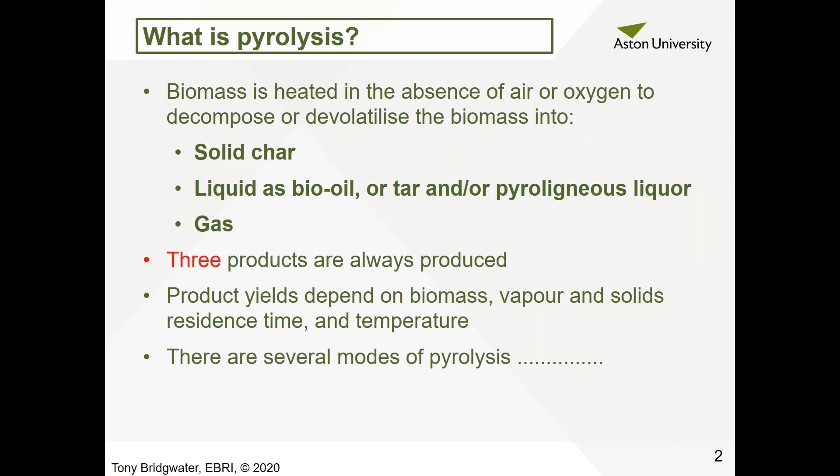There are several modes of pyrolysis. Fast pyrolysis, which is what most people are currently interested in, typically operates around 500 degrees centigrade with very short hot vapor residence times, typically less than 2 seconds, and short solid residence times. Under these circumstances, you get up to 75% weight liquid, with some solid char and some gas.

Then there's slow pyrolysis, which is a very old technology going back thousands of years. This operates at rather lower temperature, but with much longer hot vapor residence times and very long solid residence times. Under these conditions you get roughly a third liquid, a third solid, and a third gas.

Torrefaction is a relatively new technology, and this is essentially low temperature pyrolysis, typically at 250 to 300 degrees, with long hot vapor residence time and long solids residence time. The main product is a solid, typically 85%, which is intensively dried and slightly decomposed biomass.

Then there's gasification, where the main product is gas, up to 99%, with a little tar that needs to be separated before most applications, and some solid, although all the solid produced is burned within the process. This is high temperature, with short hot vapor residence time and short solid residence time, and the upper temperature is limited by the need to avoid slagging or sintering of the ash in the biomass.

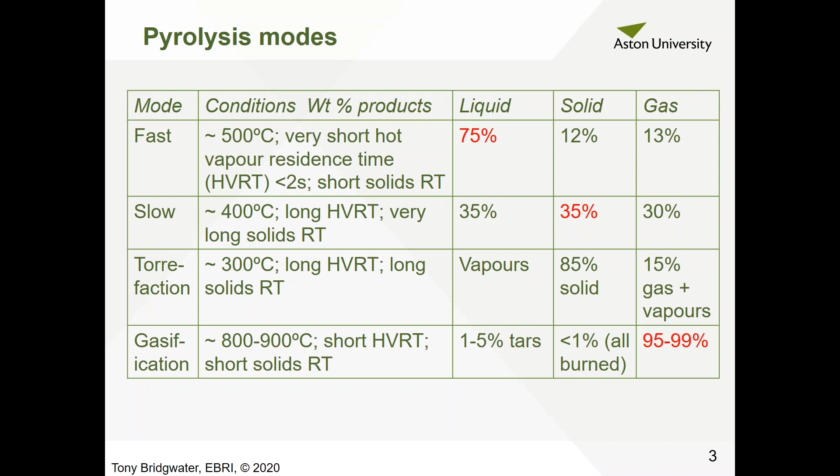Fast pyrolysis products: the objective of fast pyrolysis is to maximize the liquids. We have very high heating rates, and because biomass has low thermal conductivity, we need small particles, typically less than 3 millimeters, although some can use up to 5 millimeters. We need less than 10% water, because all the water in the feedstock ends up in the liquid product, and too much water has an adverse effect on the properties of the liquid. It can cause phase separation and reduce the heating value, though it does have the advantage of reducing viscosity. So the general rule is to limit the water content of the feed to less than 10%.

Clean wood gives the highest liquid yield, up to 75% weight on a dry biomass feed, and this is homogeneous, i.e. single phase and low viscosity. The charcoal forms about 10 to 15% weight of the products, and this contains all the alkali metals that have a deleterious effect on the quality of the liquid.

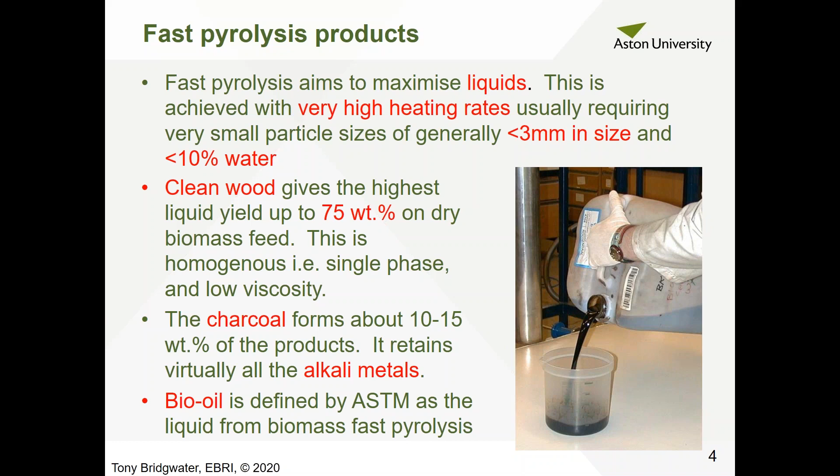Bio-oil has been defined by ASTM as a liquid from biomass fast pyrolysis, and it specifies the conditions under which it's made. Bio-oil is now limited by this definition to the liquid product from fast pyrolysis of biomass. The liquid is homogeneous, and some of the key parameters are shown here.

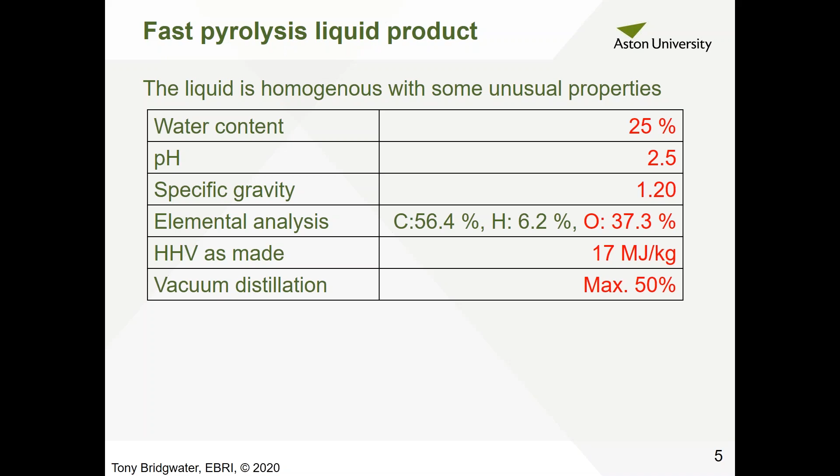In terms of yields, this slide shows the 4 main products. The red line is the organics, and you can see this peaks typically around 500 degrees. At lower temperatures, you're getting incomplete pyrolysis and lower organics yield. As temperature goes up, the organics, which form the main part of the liquid, begin to reduce. The gas yield goes up as temperature goes up, and the char yield goes down as temperature goes up.

The reaction water, which is not the water in the biomass but the product of the pyrolysis reactions, peaks at typically around 550 degrees. The important thing to remember is that the bio-oil that is discussed, reported on and worked on is the organics plus the reaction water plus the feed water.

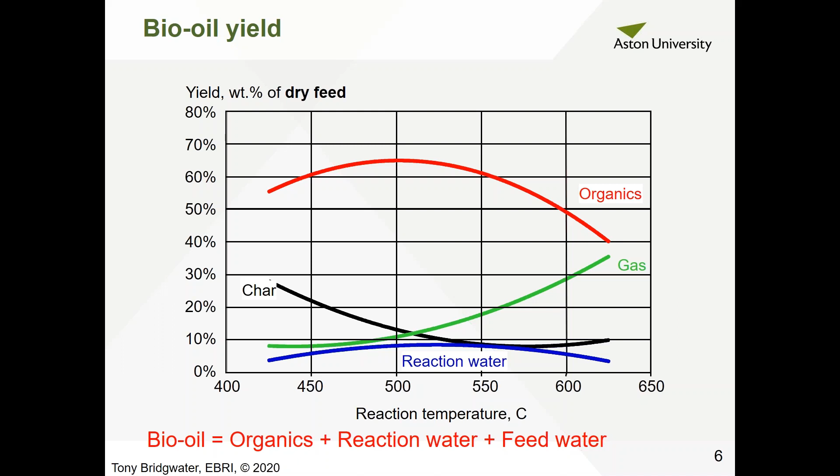Now, the fast pyrolysis requirements - again, it's important to remember that it's the organics that provide the energy and the value in the product. These can be converted into chemicals or fuels, and the organics yield is therefore very important. Some of the basic requirements of a fast pyrolysis process are high heating rates.

You need small particle sizes as biomass has low thermal conductivity. You need dry biomass, less than 10% water, because all the feed moisture ends up in the bio-oil product as well as the reaction water. A carefully controlled temperature, around 500 degrees C as I showed on the previous slide, is optimum for maximizing liquid yield. You need rapid and effective char separation because the alkali metals in the char are catalytic and reduce the liquid yield and quality.

And again, you need short hot vapor residence time, typically 1 to 2 seconds or less, because thermal cracking also reduces liquid yield. These don't sound onerous and they're not difficult to achieve, but understanding what those requirements are does help to understand how the processes work and what you can and can't convert.

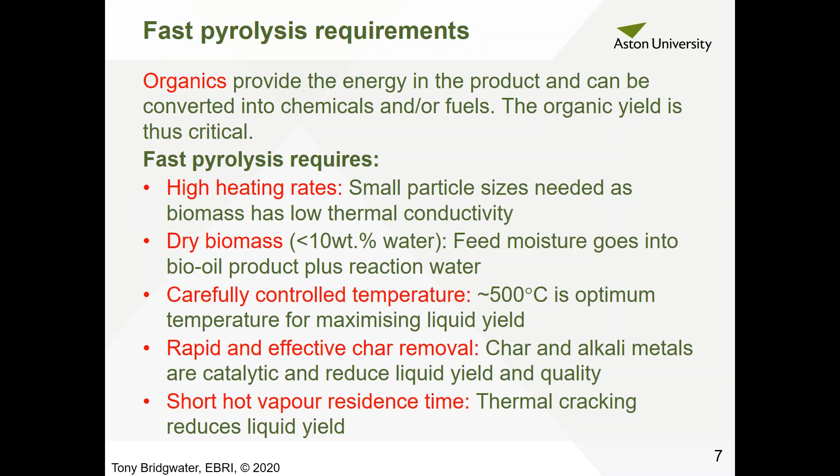The fundamentals - I'm not going to spend long on this because many people have spent a great deal of time looking at the mechanisms for the decomposition of biomass. Broido and Shafizadeh developed one of the early models for cellulose - this is only cellulose - and this is a typical pathway often followed by those modeling the process. So the cellulose becomes an active cellulose, which breaks down into water, char, and gas, and a vapor and a liquid, which breaks down into a secondary tar or char and gases.

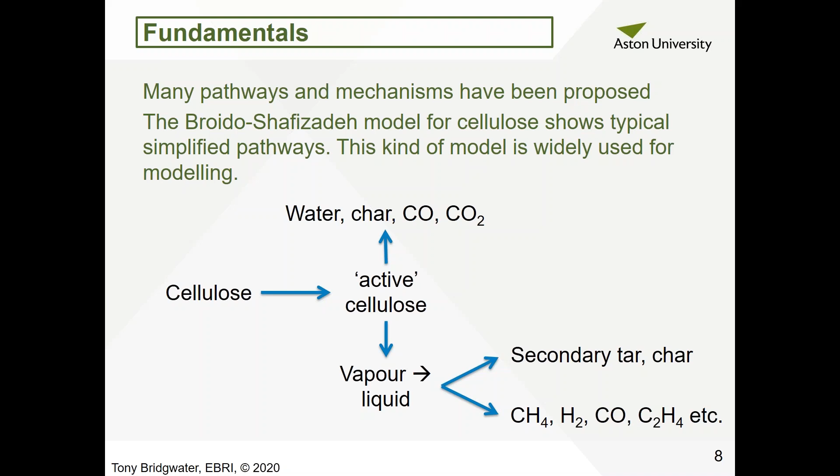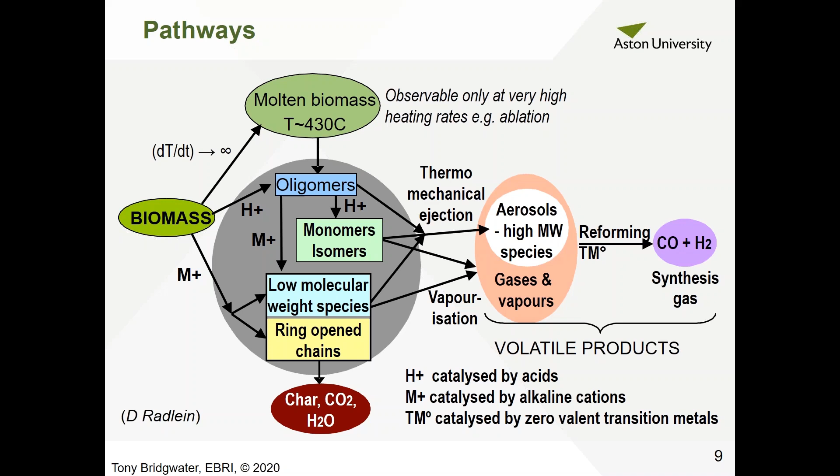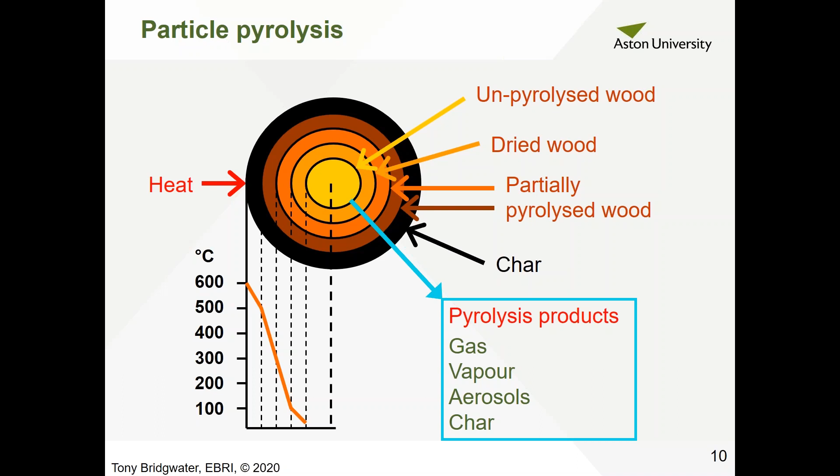Since I've already explained that the char and ash are catalytically active, the products from the center of the biomass have to pass outwards through the partially pyrolyzed wood and the char layer. That is one of the problems that gives rise to the catalytic effect of char and ash on the products. Again, many people have modeled this process, looking at how you can describe and control the rate of pyrolysis and the products of pyrolysis.

The fast pyrolysis process is made up of five or more basic stages. Firstly, the material has to be dried to less than 10%. This is because both the feed water and the reaction water report to the bio-oil.

Comminution is necessary to maintain or control the rate of heating of the particle, and for fluidized beds this is typically 2 to 3 millimeters. Circulating fluidized beds can be larger in size, and ablative reactors, of which I don't think there are any current R&D activities, can use larger pieces. Years ago, when ablative pyrolysis was used to make liquid smoke, whole tree logs were sometimes used.

Ablative pyrolysis is a process whereby the material is pressed firmly against a heated surface, and the area in contact ablates into liquid, which vaporizes into gas and solid. Then in the fast pyrolysis stage itself, you need high heating rate, controlled temperature, short residence time, and rapid cooling of the products to avoid secondary reactions.

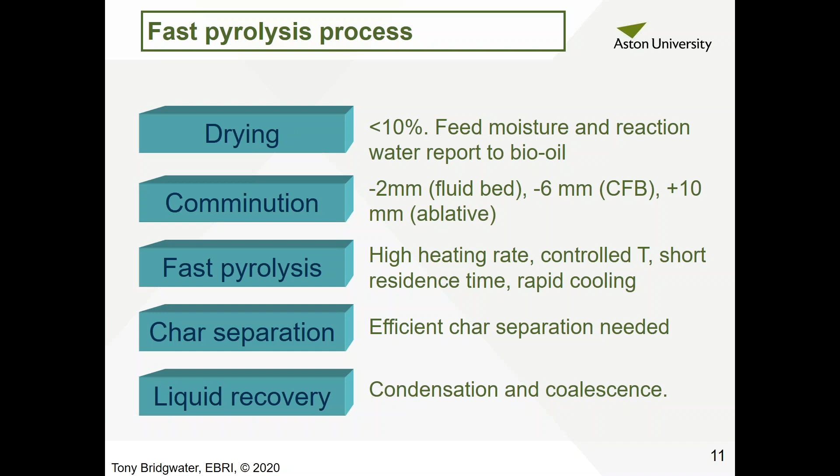Char separation is important to minimize secondary reactions and to keep the liquid as clean as possible. Finally, the liquid has to be recovered through a process of condensation, cooling, and coalescence of the aerosols formed in the process. So those are the essential stages in a fast pyrolysis process.

Looking at it more in process terms: drying, grinding, pyrolysis, which here is shown as a simple fluidized bed for illustrative reasons. Char is removed in one or more cyclones.

There's a quench, which is what we use ourselves, but there are other ways of cooling. Again, the important thing is to carry out the quenching as quickly as possible, followed by electrostatic precipitation to remove the aerosols. The products from the quench and the ESP form the product bio-oil.

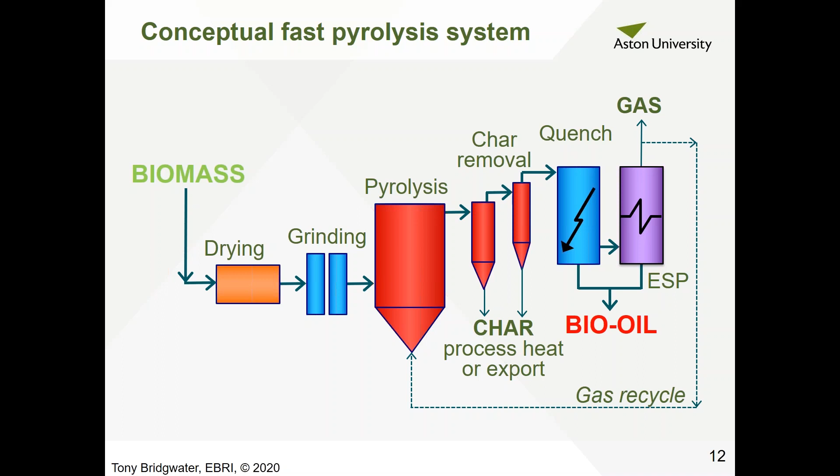The char is normally used to provide the heat for pyrolysis. It's recycled internally, I'll show you that later. And the gas can either be exported or used in the process or recycled to provide the fluidization gas.

Many fast pyrolysis reactors have been developed. Some have been commercialized, and you'll hear about one of those shortly after I finish talking. Circulating fluid beds, spouted fluid beds, and transported beds have been commercialized very successfully. But the research community has tried all sorts of things like ablative pyrolysis, vortex, and you can read the list there. What's interesting is the imagination people have used to try to achieve the basic requirements in different configurations of equipment.

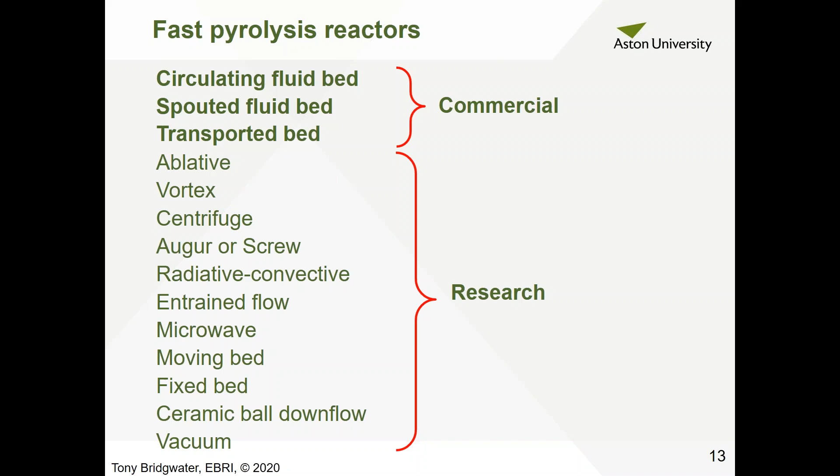Now, the more commercially orientated reactors are known as circulating fluidized beds or transported bed reactors, with the pyrolyzer shown on the left. The sand and the char are separated in cyclones and then returned to a secondary combustor where the char is burnt to reheat the sand, and the hot sand is then recirculated. This shows why commercially there isn't a char product, because it's all burnt within the process.

There's probably rather more char needed, but separating it out is not technically or economically feasible. So it's usual to burn all the char and the spare flue gas. The heat in that can be used, for example, to raise steam or provide local heat. Downstream from that, it's relatively similar to the earlier process. The significant difference here is the internal recirculation and combustion of the product char.

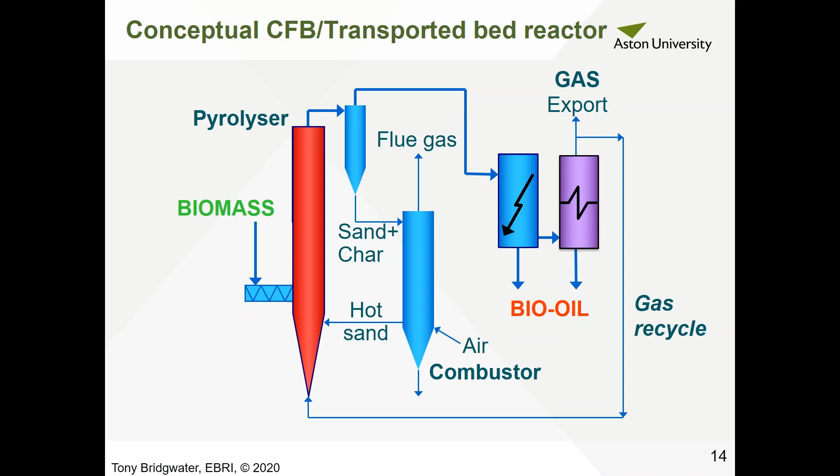Many routes are available to go from biomass to biofuels, and biofuels are currently one of the important and hot topics of the research community. In fast pyrolysis, you can gasify the liquid and take the syngas and convert it by a whole range of processes, only a few of which are mentioned here, to either form alcohols, which can be further processed, or go directly into hydrocarbons.

That is well known, and the advantage of the fast pyrolysis via gasification route is that the liquid contains virtually no alkali metals, so there's no problem with ash sintering or slagging in the gasifier. It's a very clean process, and gasification of liquids is easier technically than of solids. There's the disadvantage of the cost and inefficiency of fast pyrolysis, but the advantages of using a liquid as feed to gasification more or less balance out the disadvantages.

However, most work has gone into looking at the upgrading of the vapors and liquids from fast pyrolysis. So reading across from zeolite cracking, there's a great deal of work currently being undertaken into how to use zeolites in cracking the pyrolysis products and forming particularly aromatics. There's a process that KiOR developed, which closed down some 10 years ago now, which had difficulties commercially. And Anellotech are currently looking at zeolite cracking.

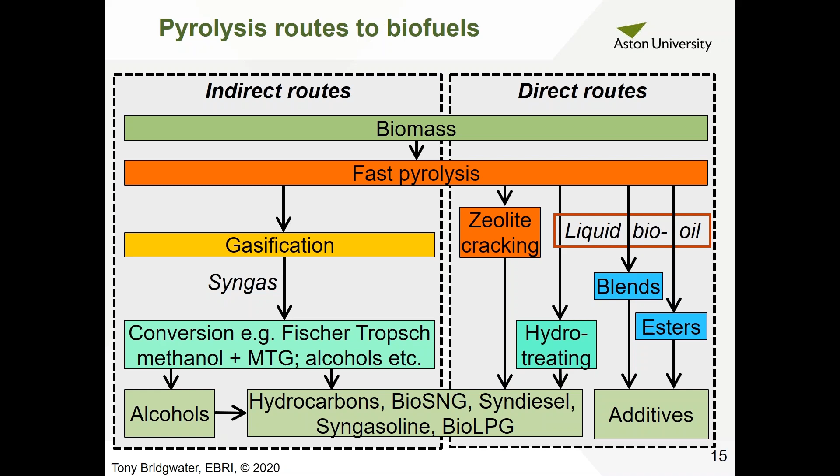The liquid bio-oil can also be blended with a variety of other liquids like biodiesel, and you can form esters as well. The opportunity to recover valuable components and fractions from the liquid bio-oil is quite valuable and quite important.

Catalysts are really important, both the catalyst you want and the catalyst you don't want. There are natural catalysts in the biomass, particularly potassium, which is particularly active in cracking organics to CO2 and water, and therefore reduces the liquid yield. Potassium, of all the alkaline metals, is the most active, and is accumulated in the biomass partly as a necessary growth agent, so some control of it is important to avoid loss of yield.

There are also heavy metals such as iron from the soil, from growing trees, for example, recovery of trees and dragging them through forests - the trees or branches can accumulate soil and waste on the outside. There's also non-metals like sulfur, chlorine, and phosphorus, which may also be present. And lastly, the char product, which contains the biomass ash, contains a very large proportion of the biomass ash, especially the potassium. This is why we want to remove the char as quickly as possible.

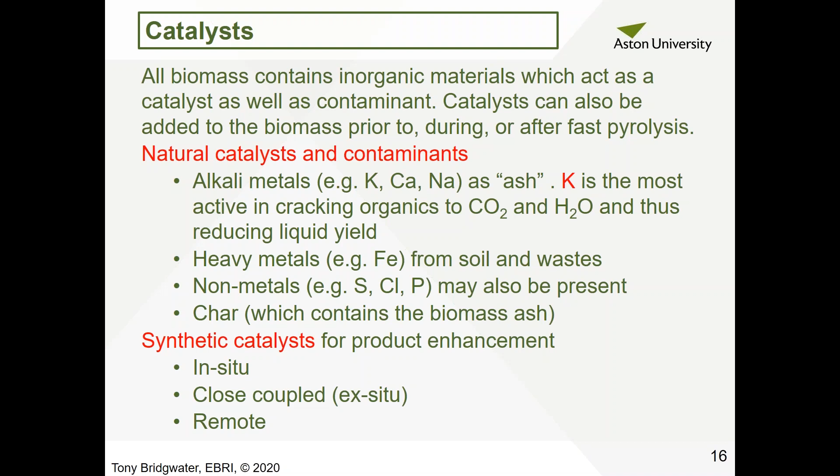We can add synthetic catalysts and put them within the pyrolysis reactor, which is not as effective as putting them ex situ close coupled, or in the case of hydrodeoxygenation of bio-oil, we can operate the deoxygenation using hydrogen remotely from the site. So we can transport the bioliquid from the manufacturing site to a separate and remote facility for removing the oxygen.

Not surprisingly, there's considerable interest in upgrading bio-oil to hydrocarbons to supplement or replace conventional fossil fuel derived materials. It's the large proportion of oxygen that has to be rejected where most of the challenge is. The two main processes: one is hydrotreatment or hydrodeoxygenation, which rejects the oxygen in the organic compounds as water. This is a high pressure process requiring gaseous hydrogen, typically operating around 200 bars.

It's a complex process because it needs hydrogen, needs high pressure, and you need to recover the unused hydrogen from the reaction. Recovery of hydrogen and recirculation at high pressure is challenging technically and economically. So the studies that have been done have suggested a yield of around 15% of a naphtha-like product to be refined to diesel or fed into a conventional refinery.

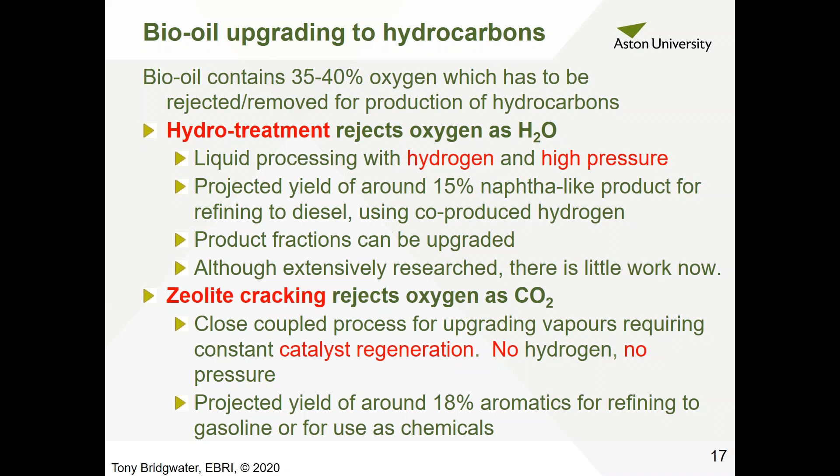Zeolite cracking does not require hydrogen, does not require pressure, and you effectively reject the oxygen from the process as carbon dioxide. This means you're losing carbon, leading to less fixation of carbon from the biomass, but it still gives projected yields of around 18% to be refined to gasoline or used as aromatic chemicals. It's important to remember that the aromatic chemical sector is the second biggest chemical industry in the world.

So hydrodeoxygenation and zeolite cracking are variations of upgrading. What's important is that there's a large number of catalysts and processes being researched and developed. And what's important, if you want to go down that road, is to understand what it is you want to make and define the quality of what you want.

For example, if you produce an upgraded product from bio-oil, you can either produce a final product by building into the process all the necessary upgrading, or you can send the partially upgraded product to a refinery to take advantage of all the upgrading processes and facilities and experience you've got there.

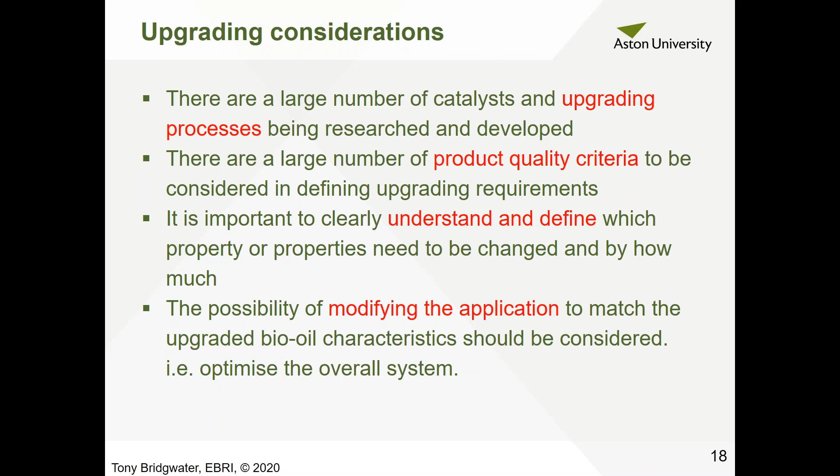But what's important in any upgrading is to clearly define what it is you want to make and what the quality is you want, because that will help understand how much you can do and how much other people can do, and where. An interesting variation is that instead of trying to make something equivalent to a fossil fuel, there's the possibility of modifying the application to match the upgraded bio-oil characteristics.

Then the second main area is pyrolytic gasification, which was on the initial table, a high temperature process to maximize the gas yield.

This is based on gasification at up to 850 centigrade, which produces a medium heating value gas and a char. The char is sent back to be combusted within the overall process, much the same as the circulating fluidized bed system I showed earlier. The whole system just operates at a much higher temperature.

The cost is higher and the carbon efficiency is lower because you're burning some of it all, but the gas quality is much higher. In the case of the Güssing gasifiers, they fed the gas to some gas engines. So that's pyrolytic gasification.

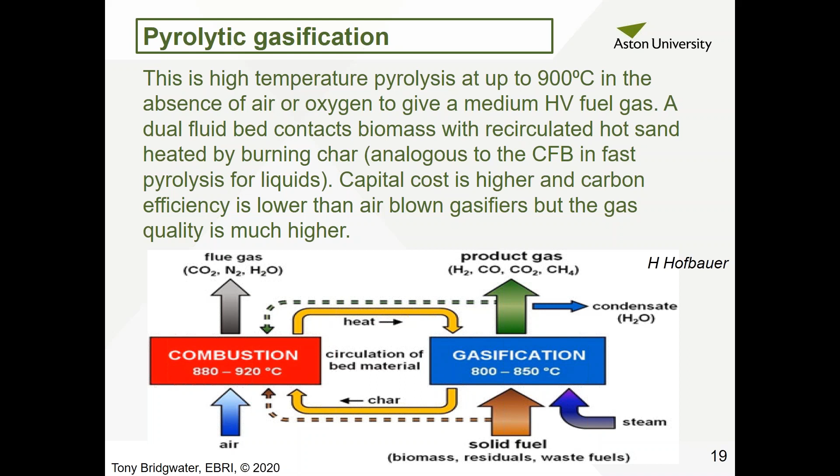It was studied extensively in the USA. Richard Bailey was one of the advocates of this way back, for those who may remember.

Then we have slow pyrolysis or carbonization. Charcoal's been manufactured for thousands of years, back to the ancient Egyptians, and it's still widely used for cooking, for example in Africa, and it's also used for smelting metals.

Brazil, for example, produces vast amounts of charcoal for smelting iron. And in Australia, they produce charcoal for smelting silica down to silicon. There's also a well-defined market for charcoal application, particularly activated charcoal.

This needs moderate temperatures with long residence times. In less developed areas of the world, small batch kilns are used. In more industrialized areas, multiple continuous retorts are used.

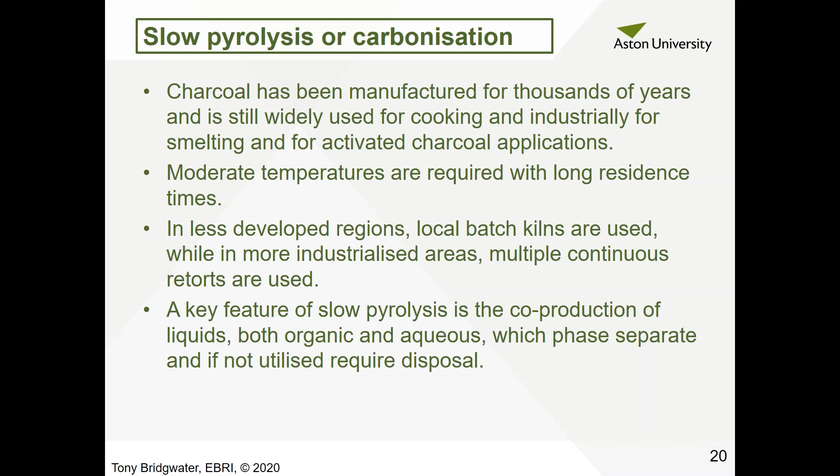A key feature of slow pyrolysis is the co-production of liquids, both organic and aqueous, which phase separate, and if you can't find a use for them, they require disposal. One way, of course, is to burn the liquids to produce the heat in the pyrolysis.

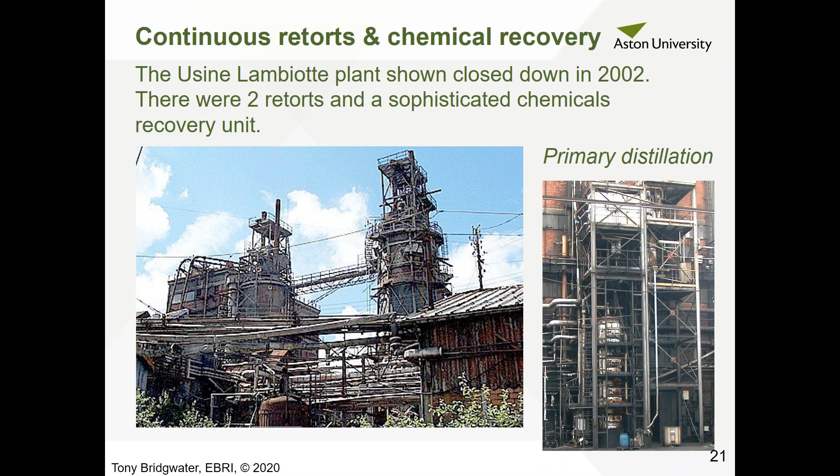These are pictures of the Usine Lambiotte plant in Belgium, which closed down in 2002. There were two retorts you can see there, and a very sophisticated chemicals recovery unit. On the right-hand side, you can see the primary distillation column. Behind that, there was a multiplicity of separation and purification techniques for recovering some fine chemicals.

This is a summary of the mass balances and finances of that operation at the turn of the century. The facility processed around 95,000 tons per year of wet wood, and made around 25,000 tons a year of charcoal.

It made some pyroligneous liquid, which includes water and organics. The charcoal was valued at, I've conservatively estimated, around €100 a ton, which gave a charcoal value of roughly 2,500, or 31% of the total income from the plant.

There were acids and alcohols recovered, some oils and some fine chemicals. The notable thing here is that of the 95,000 tons a year of wet wood, 56 tons of fine chemicals produced the most income from the process.

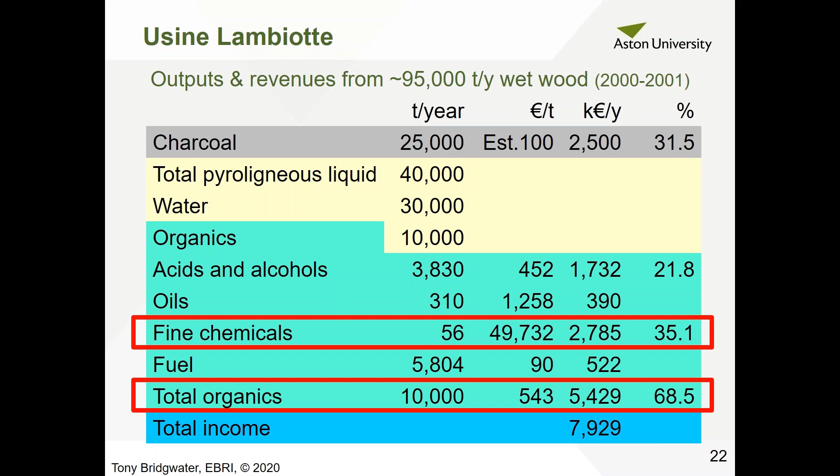This is the opportunity, I think, in the biomass and biomass pyrolysis area, the opportunity to seek, find, and exploit the fine chemicals. You can see here that given the right understanding of the chemistry, the processing, and the market opportunities, the opportunity for significantly enhancing the economics is significant.

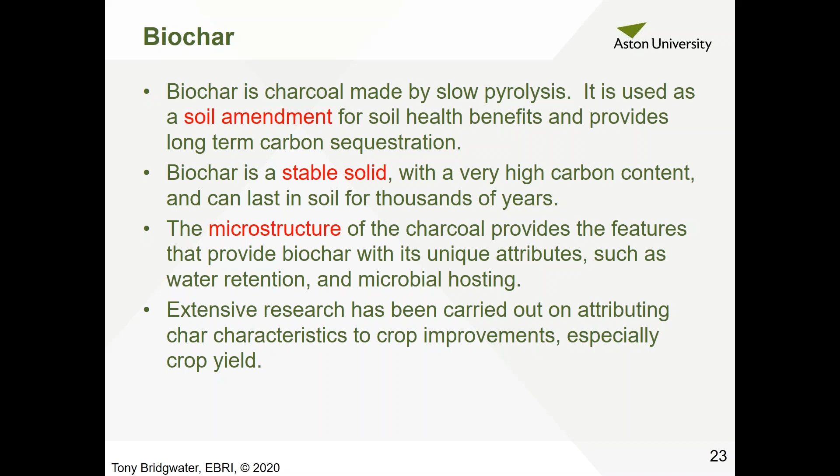Biochar is talked about a lot. It's charcoal made by slow pyrolysis, and it's used as a soil amendment for soil health benefits, and it also provides long-term carbon sequestration. Biochar is a stable solid, and residues have been found in South America going back thousands of years. It's the microstructure of the charcoal which provides the features, mainly water retention and microbial hosting, which encourages activity beneath the surface of the soil. A great deal of work has gone into attributing char characteristics to crop improvements, especially crop yield, and there are some quite extravagant claims made.

So biochar is one of the currently popular products from pyrolysis, and offers significant advantages. Torrefaction, I mentioned earlier, is essentially low temperature pyrolysis, and the purpose of this is to enhance the biomass by removing water, reducing the hemicellulose, thereby improving the heating value, and particularly it was originally developed to improve the friability of the product for grinding and co-processing, like adding biomass into coal-fired power stations.

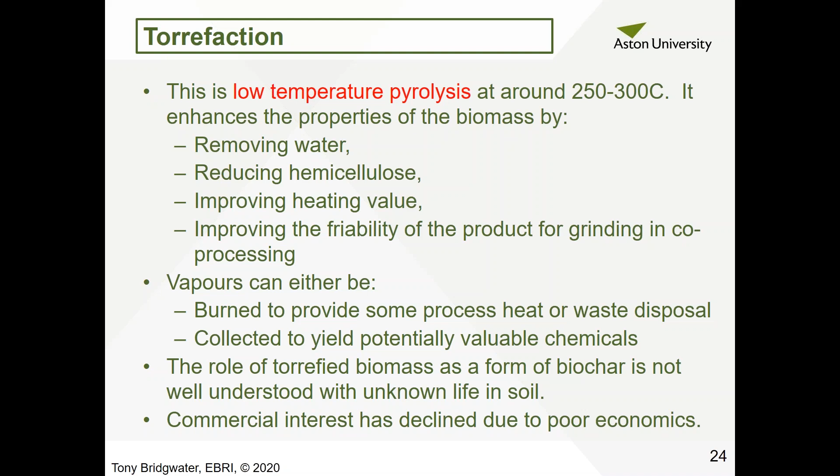There's a small amount of the vapors that are produced, roughly 15%. These can either be burnt to provide some process heat, or burnt to dispose of the waste, or collected to yield potentially valuable chemicals. Using torrefied biomass as a form of biochar has been proposed, but it's not well understood, and there's no long-term experience of how long it lasts in soil. Many companies started up in Europe to develop torrefied biomass, but the economics were not sufficiently attractive, and many of them have now been closed down.

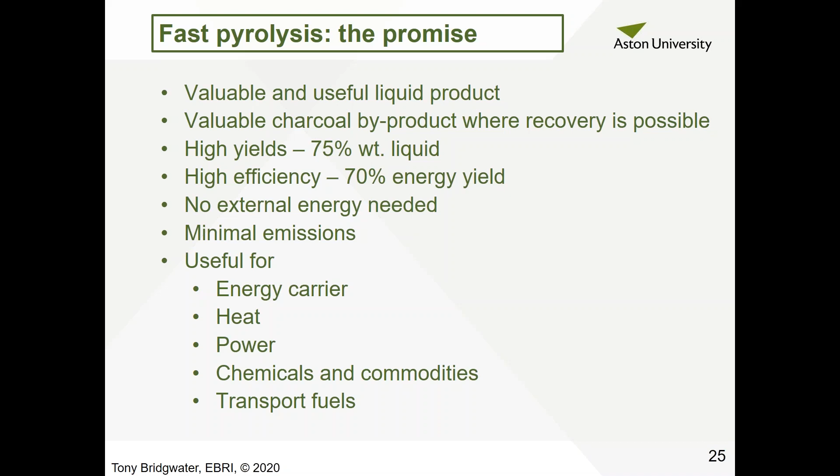So the promise of fast pyrolysis: you get a valuable, useful liquid, you get a valuable charcoal byproduct where you can recover it, high yields, high efficiency, no external energy, minimal emissions, and the product is valuable as an energy carrier for heat, power, chemicals and commodities, and transport fuels. Thank you very much, and I'm sorry if I've overrun slightly.

Thank you very much, Tony. I think that was a very interesting presentation on the fundamentals of pyrolysis and all the different forms it can take and the different products. No problem with running a little over the 20 minutes, but I encourage everyone to post questions in the chat. So far, I cannot see any. I don't know whether T sees questions in the chat yet. Not in the chat, but Dina, you have another line with questions, 2 or 3 rows above. Maybe you can also see that. Oh, no. Okay.

So maybe you go ahead, and we have around 12 minutes for questions to Tony, Q&A. One question from the participants was: what is the correlation between solids, biomass fixed carbon, and biomass feed particle size? I only heard the first part of that, I'm sorry. Okay, the question was about what is the correlation between solids and biomass fixed carbon and biomass feed particle size? I don't think there is a relationship.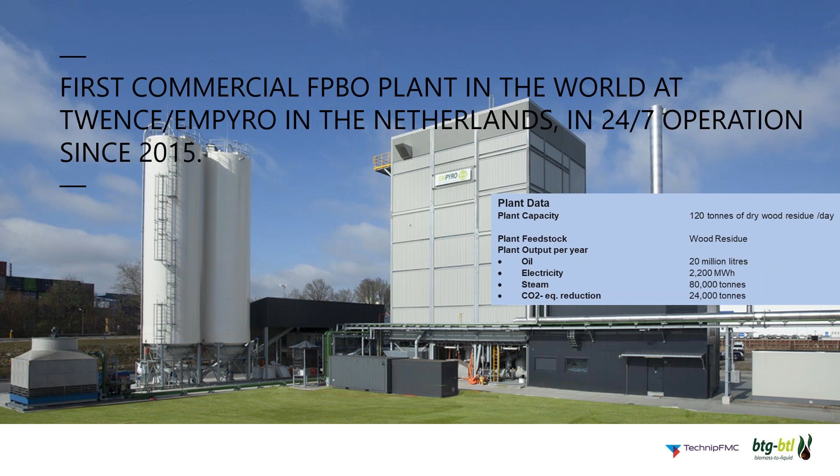So you can see that developing a new technology costs time, and you need to be patient, continue working, step up every time you're falling down. So it's really important to be prepared to go through this long route of technology development.

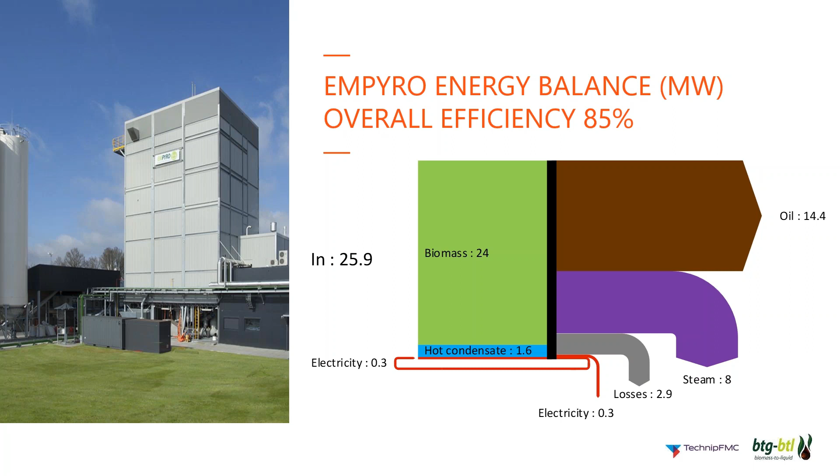If you look at the overall energy balance, we're going in with around 25 megawatts of thermal energy total, converting it into around 15 megawatts of oil, around 8 megawatts of steam, and we have around 10 to 15% losses. So the total efficiency is quite high, 85%.

In Empyro, we're not only making oil and heat, we're also making electricity. We have a steam turbine on site, and around 2/3 of the electricity from this turbine is exported, and 1/3 is used for our own use.

Empyro was delivered successfully, as I mentioned, and we're very happy to say that we have a contract for delivery of 2 new plants, one for Finland. It will be delivered in Lieksa, Finland, and one will be delivered to Sweden. It's actually a kind of copy-paste of Empyro.

That was the good thing of having Empyro. Both customers have visited Empyro quite a few times. We even did a test of the biomass residues from the customer at Empyro. It was really important to show the customer that we can do it.

You can say that pyrolysis oil has been quite a long time promising, but now we are proving that we can do it. What is interesting to mention is the scale of the plant.

All the plants are at a scale of 5 tons per hour. I strongly believe that you should not build these plants too large. It should be a good size. 5 tons per hour is a kind of intermediate size, 25 megawatts.

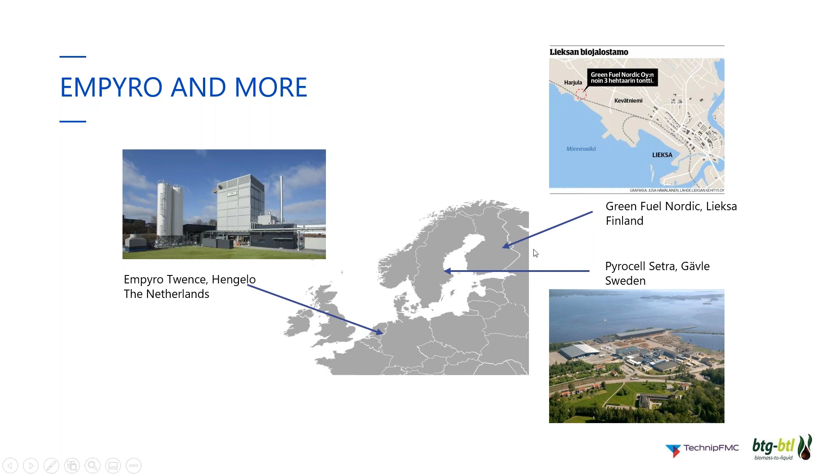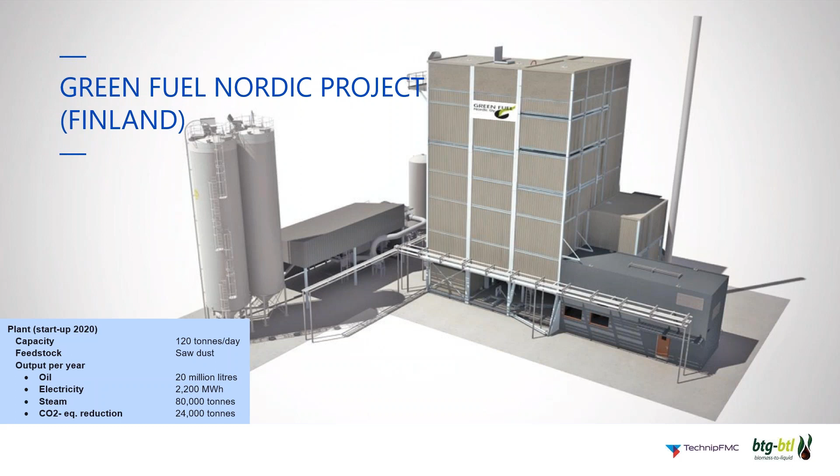In the biomass world, it's considerable. In the petrochemical world, it's small. But I believe that this conversion of the crude biomass to the crude oil should be relatively small. So I would say that we are scaling by numbers, and not by building huge plants. The biggest reason is that transportation of biomass can be quite expensive.

We believe that you should build these plants very close to the location where the biomass residues are. Here's a picture of the Green Fuel Nordic plant, which will be located in quite a cold surrounding. This plant is designed to operate at around minus 36 degrees Celsius, which is very important. The rest of the values are the same as with Empyro.

The project in Sweden, Source to Tank - the exciting thing here is that the crude pyrolysis oil will be directly used by Preem. They will use it in their FCC, at a co-blending rate of around 1%, equaling around 15,000 family cars that can be powered per year. And the good thing is that it complies with the European Renewable Energy Directive number 2.

First startup is expected in 2021, and with the project in Finland we expect to have the first oil this year. You may have seen our LinkedIn message - we are now doing the factory acceptance test of the Finnish plant at this moment at the Zeton premises. The plant will be sent end of June to Finland, and then built at site within around 8 to 10 working days.

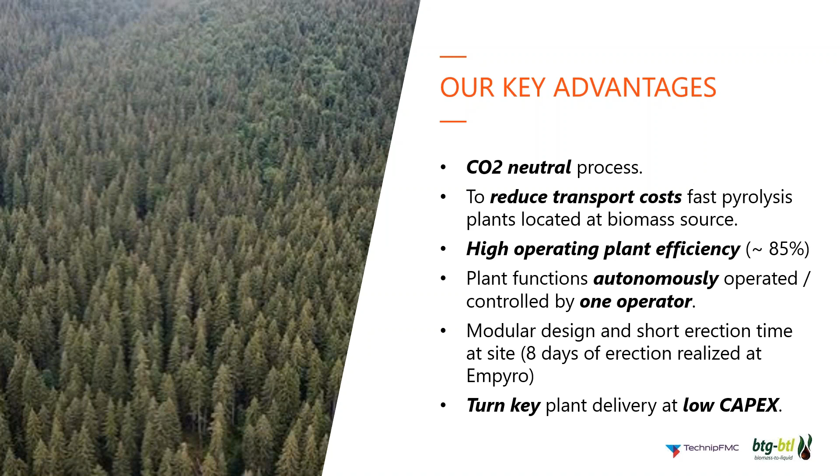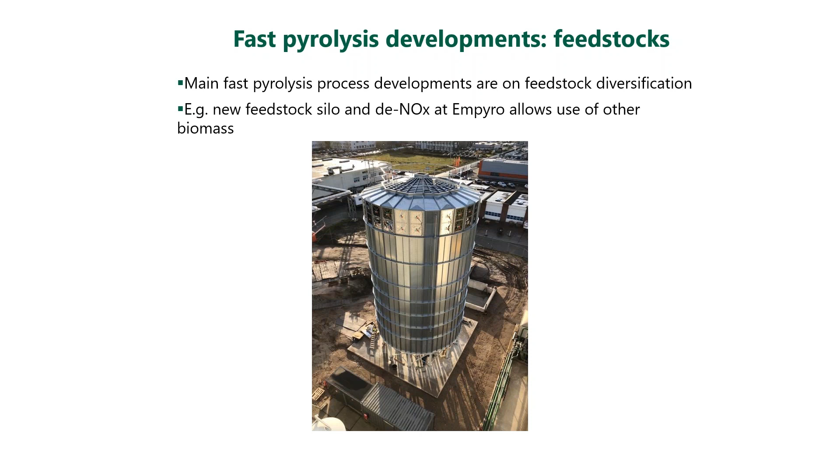Exciting is the modular design. The complete plant is built together here at Zeton, then it will be dismantled, sent to site, and built up at site in around 8 days. Very exciting and very fast, and especially in those low temperature climates, it's very interesting to have this modular design - a turnkey plant at a low capex.

Looking at other types of feedstocks at this moment, the silo is now finalized at Empyro to be able to handle more types of woody biomass residues. And at the same time we are also now installing a DeNOx at Empyro to also allow use of other biomass.

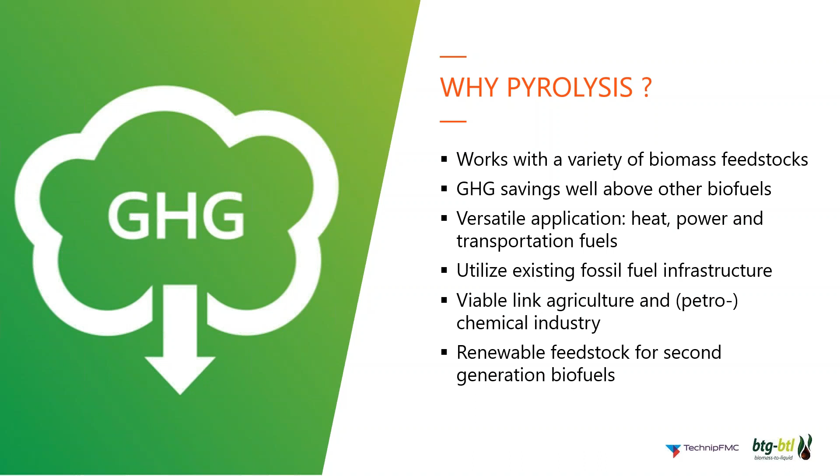Why would you go to pyrolysis? Pyrolysis works with quite a variety of biomass feedstock. Greenhouse gas savings are well above other biofuels, and it can be used for heat, power, and transportation fuels. Pyrolysis is actually a kind of link - it's linking the biomass world into the petrochemical world. Using biomass directly for petrochemical use is almost impossible, which is why it's very interesting to go to a liquid to make this connection between these two worlds.

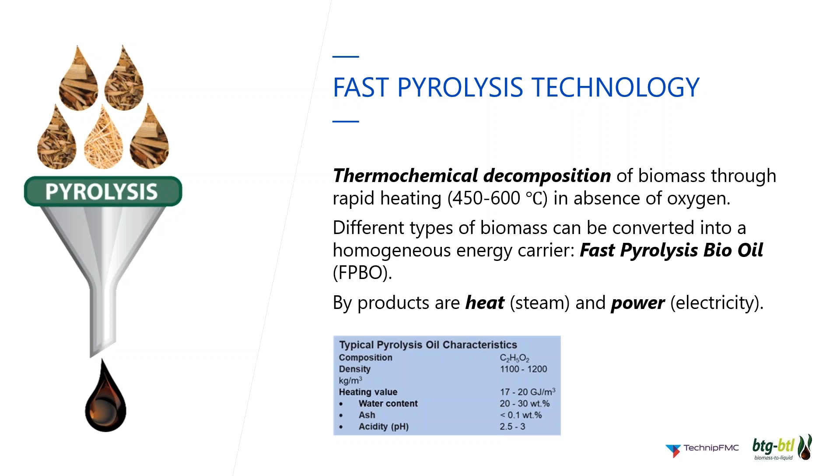Very shortly - Tony already explained it very well, so I cannot add too much. We are heating biomass to around 500 degrees Celsius. You're not allowing oxygen, you're creating a kind of oily smoke, and this oily smoke is condensed in our condenser. We're using the remaining products, like the gas and the char, to drive our own process.

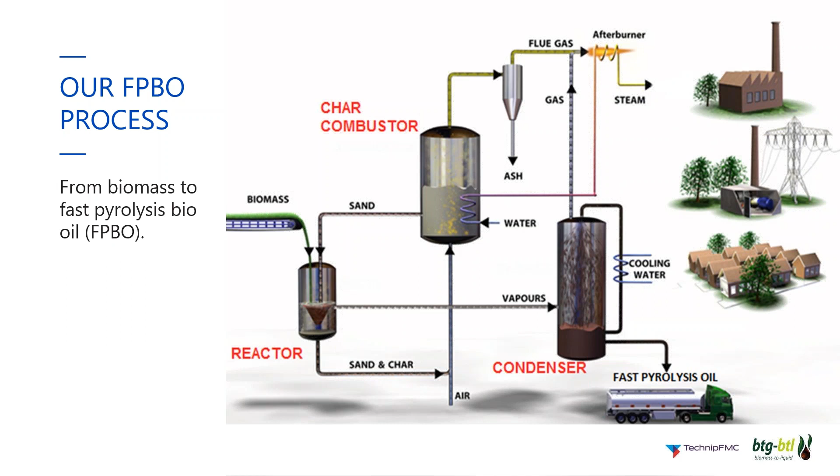This is the total process. As mentioned earlier, total efficiency is around 85 to almost 90%. It is very important to use the heat. Heat can be used, in our case at Empyro, to deliver to AkzoNobel, which is quite a nice income stream. And the steam in both projects in Finland and in Sweden is used to dry the biomass, which is very wet in those cases.

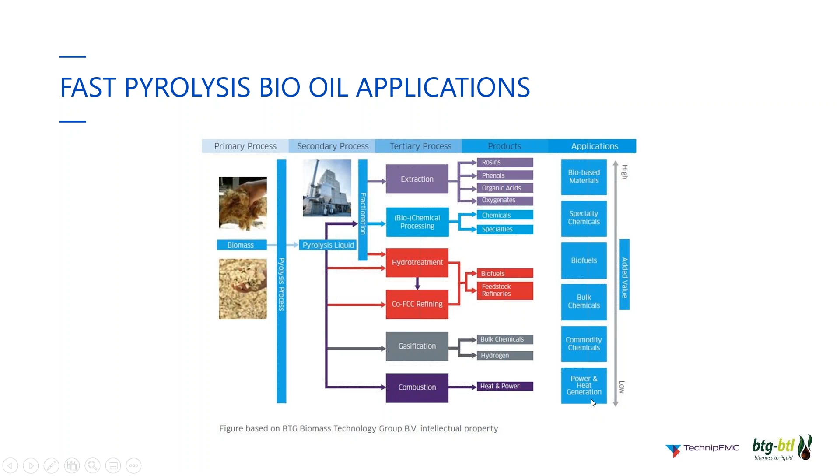People say, of course, I want to go to high value applications. On the other hand, I'm convinced you should always start here, with the low added value applications, and then step by step climb the ladder, and in the end make bio-based materials, while the residues can still be used for power and heat. That's the mistake I see a lot of companies making: only concentrating on the top part, bio-based materials, forgetting the lower part. Then there's always a horizon of 5 to 10 years away and nothing will be successful. So start here, low added value, and step by step climb the ladder.

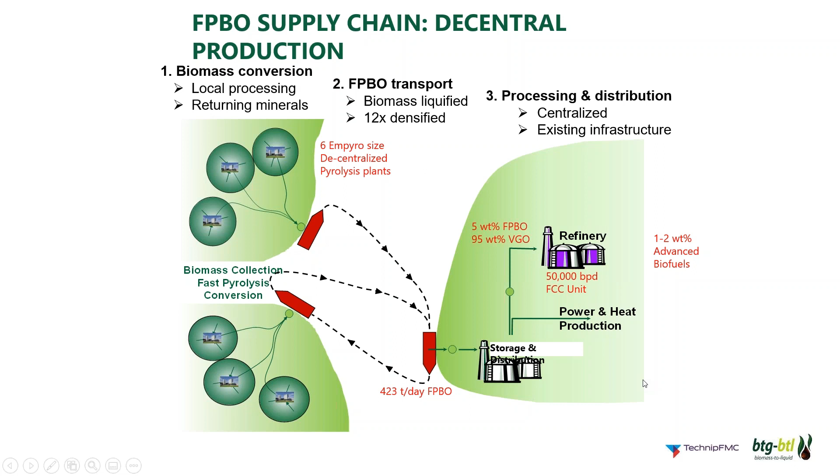Overview, which I mentioned earlier: I strongly believe in bringing this relatively small, decentralized pyrolysis plant to the biomass, converting it into crude pyrolysis oil, and this crude pyrolysis oil is sent to a refinery. When you're co-feeding around 5% pyrolysis oil, you get around 1 to 2% advanced biofuels, which is an exciting, cost-effective opportunity in the market at the moment. The oil is also used in a boiler with FrieslandCampina.

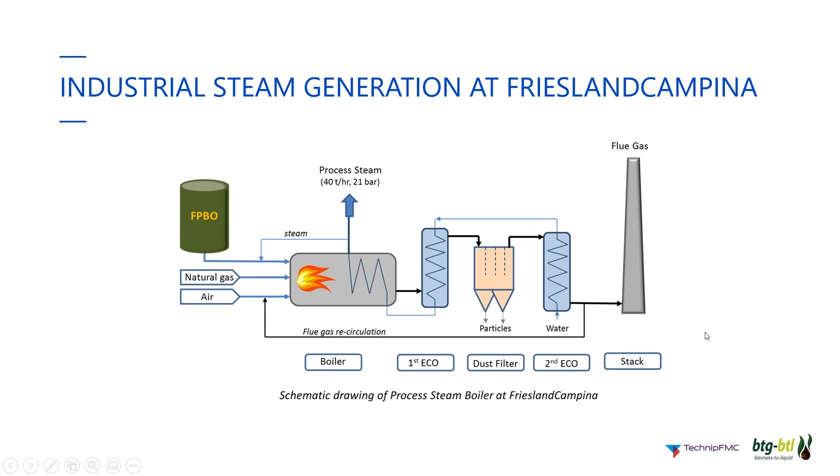Another option is to upgrade the pyrolysis oil—that's the BTG technology with the Picula catalyst. It's done in 2 steps. After this first step, you could go up to around 20 to 30% in an FCC. And if you want the complete chain to make the best quality, you go further, to get a transport fuel directly, without using the existing infrastructure.

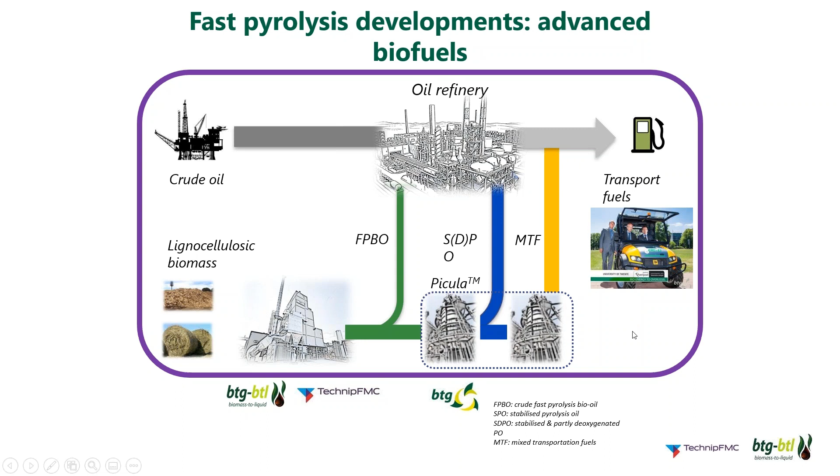So up to this 5%, you have excellent efficiency. If you go above, then it's better to treat the pyrolysis oil to a higher quality, and then you can go to a higher blending rate in an FCC.

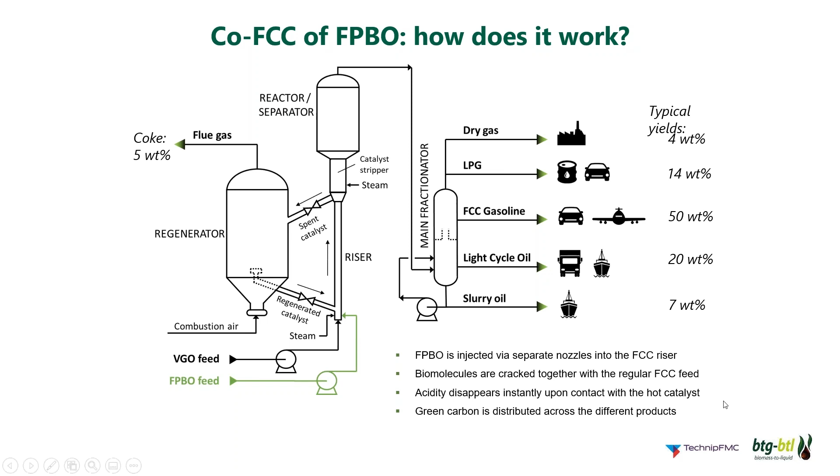Developments at the moment, co-processing: Preem is the first one worldwide for co-refining the crude pyrolysis oil. We can see more and more interest from other major oil companies who are now investing in this co-refining route, which is of course very interesting for us.

The Renewable Energy Directive is interesting. Why? Because we do not have to compete against the oil price, since there's now a mandate—an obligation to blend a certain percentage of second generation fuels. Pyrolysis oil is one of them, and because of this obligation, we do not need to compete against crude oil. We can compete against our closest sustainable alternative, which is very interesting for us. So even if the price of crude oil goes down, we don't mind too much.

As mentioned before, we have published a position paper assessing the suitability of the various co-processing methodologies, also highlighting that the C14 analysis is not suitable and that the bookkeeping method is needed. We are at this moment in in-depth discussions with EU policymakers on these topics, which are ongoing.

I'd like to summarize as follows. Fast pyrolysis is proven at commercial scale at the moment, and worldwide capacity is expanding. The current pyrolysis application is renewable heating oil, and now, in the near future, also co-processing done by Preem in Sweden, with more applications of pyrolysis under development. We consider that pyrolysis oil is the starting point of the bioliquids refinery. Thank you very much.

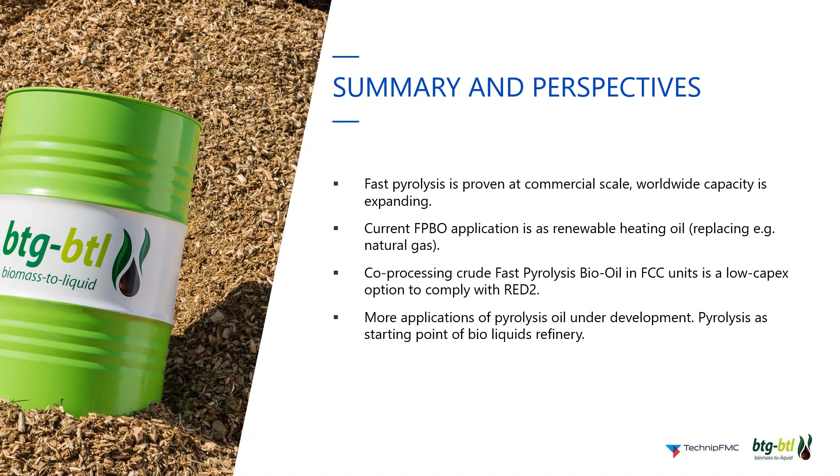Thanks a lot, Gerhard. That is really an impressive development that you've made and the company has made. Thank you. Acknowledging that the first steps take a long time, but you seem to be on a very promising path right now. Very exciting times for you.